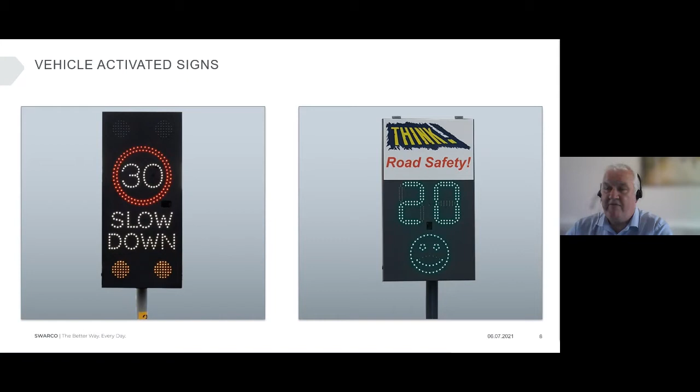The sign is supplied with a Bluetooth interface to allow download of log data from the MVD and upload of controller configuration via the Bluetooth link. The sign components are DIN rail mounted to allow easy servicing and maintenance of the sign in the event of a failure, if a rail mounted component is established as the cause of the fault.

Effectively, that's about the extent of simple MVD activated VAS. Approaching vehicles activate the sign display based on a preset threshold. The controller configuration is stored on a small onboard memory, and the MVD can be utilized to provide log data to inform the client on traffic flows, traffic behavior, traffic volumes, and counts.

Simple VAS are still an important part of an ITS infrastructure where speed or a static hazard, such as a bend ahead, are a permanent feature. The best preparation a driver can receive is to make them aware of the hazard along with a message to reduce their speed.

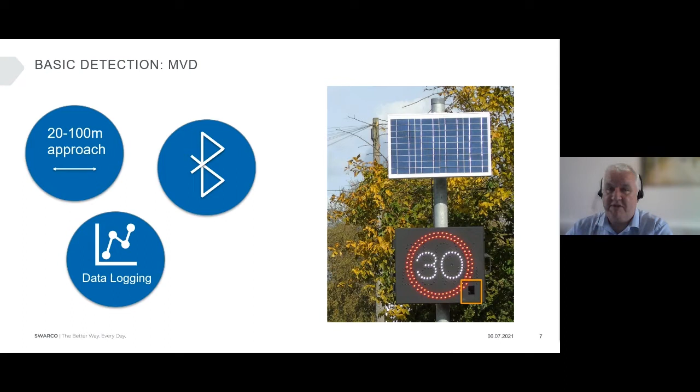Following increased customer focus on value for money and desire for more functionality for VAS products, Swarco began a development program back in 2014 to design its own sign controller, allowing greater flexibility in conjunction with our focus on in-house development and product testing to meet the most rigorous standards demanded by EU and UK regulations. The result of this development was the Swarco Perfectus controller.

The word Perfectus is Latin, and was selected as the name of the controller following a competition held for the Swarco team in 2016. The basis of the Perfectus controller is to provide a basic platform for our designers and engineers to install configuration files, provide outputs to displays and radio transmitter equipment, provide specific or closed contact input from a range of devices and systems, including the radio platform, and allow the controller to support the wide range of functionalities within an ever-developing sector.

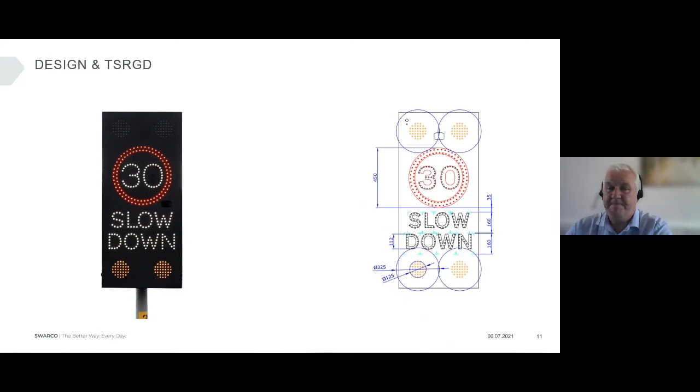To help better understanding of the various solutions the Perfectus controlled sign and system can offer, we've prepared a series of slides to demonstrate how the hazard warning suite of products can be implemented in real-world situations.

The location shown is a real location, Penshire Bridge near Sunderland, built in 1890 by David Balfour for the princely sum of £8,000. I should stress at this stage that we haven't implemented these solutions at this site. This site was chosen merely because it features a host of different potential hazards to which we could apply solutions, and the solutions shown have all been implemented in different locations around the country.

So as you can see, this section of road is typical of many urban and semi-urban schemes where we have vehicle interactions. At its most basic level, where vehicles are approaching the junction in an urban area, the first thing we can ask a driver to do to minimise a potential accident is to reduce their speed. So a VAS placed on the approach to the area is the simplest solution to a potential hazard problem. With the VAS placed in location, the driver may be warned of their speed, or they could be warned of the crossroads ahead by using the diagram 504 crossroad triangle.

So far, so good - our driver sees a sign to highlight the hazard ahead. Having said that, we know from anecdotal evidence, along with a wealth of independent research and testing, that drivers do become complacent to signs they see regularly, whether they be fixed plate signs or illuminated warning signs. TRL have produced a wealth of information on this subject, and TRL 548 is an invaluable document on the subject.

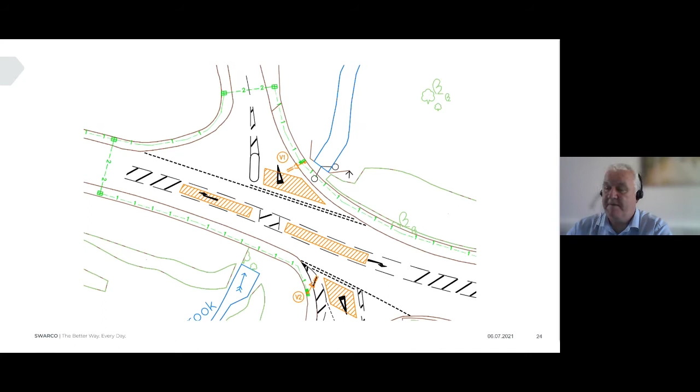Speed detection and junction hazard detection are scenarios that apply to lots of areas around the country. But in all of the cases we've shown up to now, the hazard is a temporary hazard, such as a speeding vehicle or a vehicle detected at a stop line.

We appreciate, however, that some natural hazards can cause significant problems, and in some cases massive immediate and ongoing disruption. A natural hazard in this case is a hazard that's part of the existing surroundings, or one that arises as a result of natural or climatic conditions.

The OVD utilizes a pair of crossroad beams with detector to enable directional sensing in conjunction with a ground loop below the beam.

When a high vehicle approaches the hazard zone, the beams are broken to establish that the vehicle is higher than is safe or practical for the forward route. In this case, a pair of beams is used to provide directional sensing because the beams cover the whole carriageway. Directional beam sensing ensures that the vehicle breaking the beam is the vehicle being warned of the hazard, because a single beam can be activated in either direction.

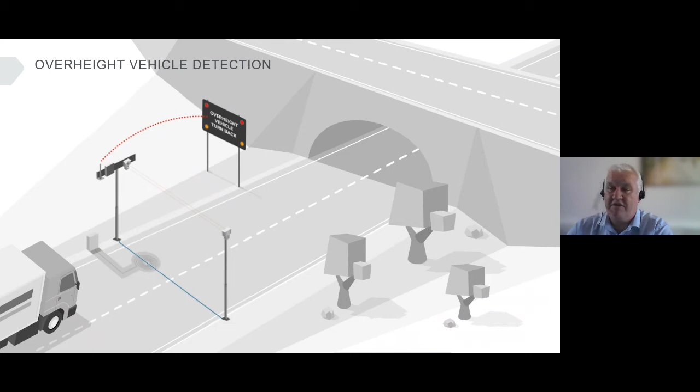A diversion route can be offered, either to turn back or to follow a left or right turn diversion. The main factor to remember with preparation of an efficient OVD system placement is that often the diversionary routes are as important as the detection and hazard avoidance itself.

While it's theoretically safe and proper to ask a vehicle to turn around as part of a diversion, we appreciate that this can be particularly disruptive for traffic through a detection area. So often it's vital to consider a wider diversion route that utilises the detection and warning sign well before the hazard itself, thus ensuring that the traffic, including the high vehicle, all travel in a regular manner without disruption.

OVD systems are an essential part of hazard avoidance on the modern highway, as large vehicles have become much more prevalent on urban and trunk routes. Existing infrastructure such as railway bridges often can't be modified to suit the requirements for larger vehicles, and groundworks to suit the vehicles will be costly and disruptive for extended periods. So a well-planned OVD diversionary route can be an economical solution for highway planners.

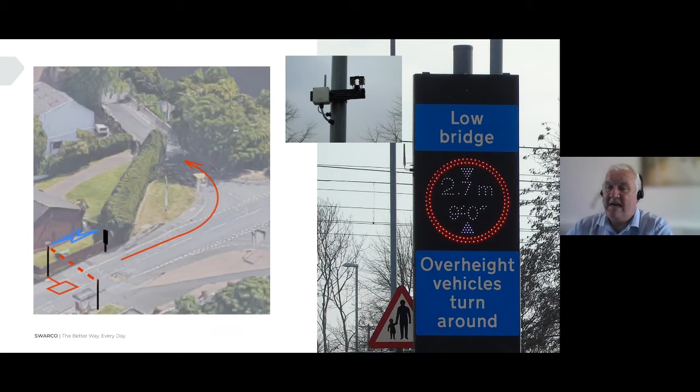A route is also prone to weather-related hazards, and this can be just as disruptive to traffic flow. Local authorities or route operators can sometimes be caught out by quick changes in climatic conditions that create a hazard for drivers, and so an automatic warning system can be crucial in not only protecting the local traffic, but also highlighting a developing problem to the route operator remotely.

An example of this could be an icy road. In this scenario, surface-mounted ice detection can transmit warnings of a cold or icy surface to the sign controller, and as with previous scenarios, the input from that detection in conjunction with a vehicle approach can highlight an ice warning to drivers, and if necessary, advise the drivers to divert to another route.

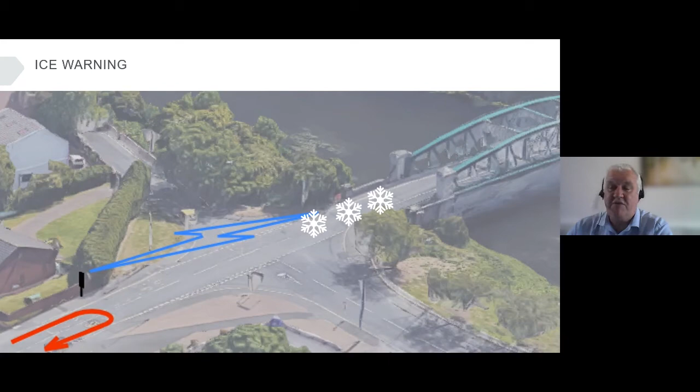Flood detection acts in much the same way. The flood detector is mounted in the waterway and can provide an output by radio to the sign if the water levels reach a point where the route is flooded or is about to flood. As with the ice warning, this provides a message to approaching drivers that the route may be impassable and that an alternative route should be taken.

The important differentiating feature of flood detection is that differing aspects of the output from the detector can be used to prepare the messaging. The speed of rise of the water level, for instance, can be used to move directly to the urgent phase of flood warning rather than the standard first phase, which may be more precautionary.

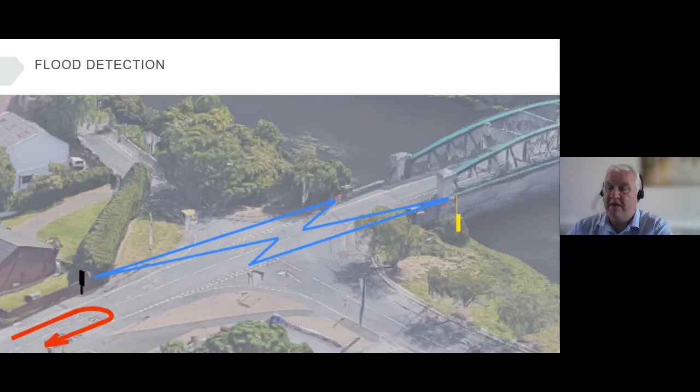With both of the solutions detailed, as previously mentioned, drivers will become aware over time that a triggered system is working with full efficacy based on their understanding that the hazard they are facing actually exists thanks to real-time activation, as opposed to the permanent plate warning sign of risk of ice or of flooding that is always there year-round and becomes invisible to regular users, or a temporary sign that puts the road operative or local authority in the position that they have to attend site to deploy that temporary signage, which allows the operating authority to deploy those valuable resources elsewhere.

Often, once a solution has been implemented, the client can utilize local media to highlight further to the public that a solution to a problem site has been implemented, and that the local authority are providing solutions to help with road safety for local citizens as well as the through traffic.

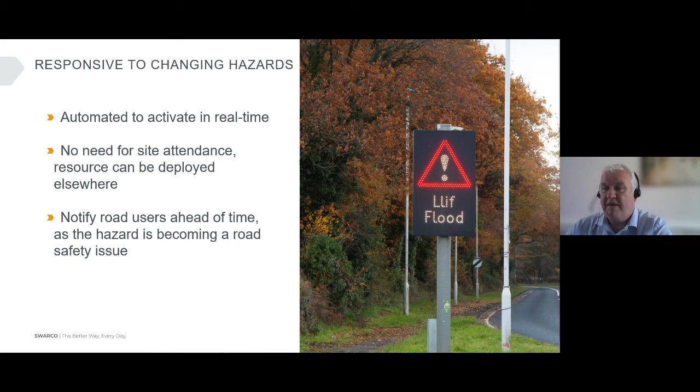Another innovative use for Perfectus control, as we've recently completed, is a tidal flow traffic solution. Tidal flow refers to patterns of traffic during the day where traffic volumes can require lane direction changes to facilitate efficient movement of large traffic volumes.

The Aston Expressway is a classic example of the system, along with ALR, or all-lane running, motorway sections. As we apply this technology to our standard urban environment, tidal flow can be used on a route where, in normal times, simple two-way traffic can be operated. As the sign shows green arrows to proceed or red crosses to prohibit lane access, traffic flows normally.

If, however, our route is subject to large traffic volume in one direction, whether it be general rush hour traffic or, for instance, access to an urban area for a sports or entertainment event, the traffic can be converted to a two-lane one-way system with tidal flow operating within a larger traffic guidance system.

The wider system can advise drivers to follow a specific route toward a destination, and then the tidal flow system, in conjunction with route alterations, can assist in moving large volumes of traffic into and then out of a specific area. This tidal flow system has recently been implemented in an off-highway scenario by SWARCO for Peel Ports at the 12 Quays development in Birkenhead.

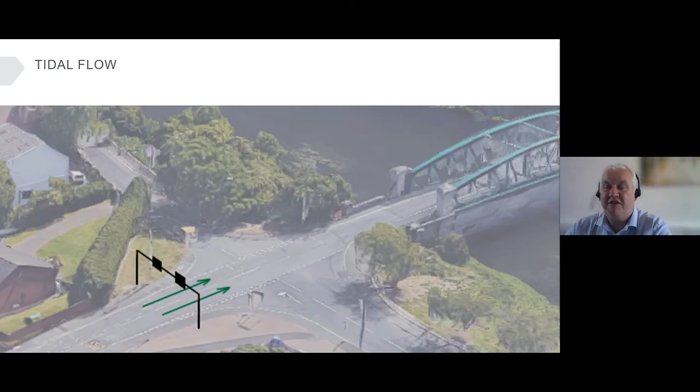A three-lane access is used for freight ingress and egress from ferries. So as the docks are emptied, the traffic is biased to two-lane exit with one-lane entry, and then it's switched to two-lane entry with one-lane exit for new cargo as the ship is prepared for its next sailing.

The scenarios and solutions we've explored thus far are all based on the interaction of vehicles with vehicles or vehicles in the environment. These interactions can be dangerous and costly, both for those involved and those affected, but thankfully, the inherent safety of vehicles that have been developed over time to protect their occupants means that our primary focus has been on supporting their safe passage.

With micromobility and non-motorised users, our focus is different. Micromobility has developed as a sector in recent years, covering not just cycles but also scooters, now increasingly prevalent in urban environments where people of all generations are being actively encouraged to move to cleaner forms of transport.

Add to that the presence of NMUs, or non-motorised users, and a vehicle interaction with an MM or an NMU is brought into ever sharper relief, especially as we move into an area of shared spaces, whether it be cycle routes on roads, cycle superhighways that intermingle with traffic highways, and semi-pedestrianised town centre spaces.

Pedestrian warning has always been a core element of the SWARCO safety signs range. In its simplest terms, pedestrian warning is used predominantly for school pedestrian traffic, with the sign utilising an onboard timer to activate flashing ambers around a retro-reflective warning symbol and associated message.

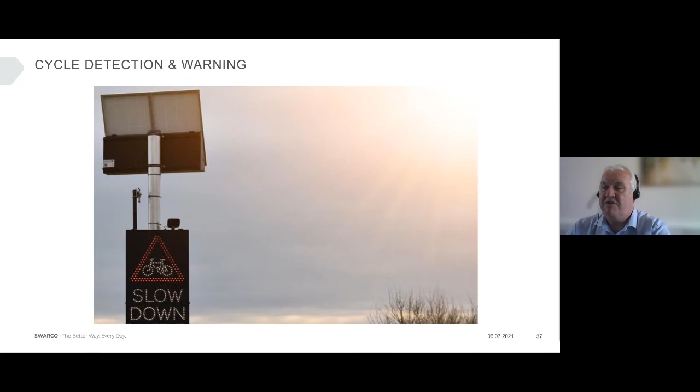While cyclists were the primary focus of the scheme in planning, it was acknowledged that drivers were still an important part of that assessment equation, and that driver safety was still compromised by the restricted visibility into the monitored area. So the use of the MVD to warn drivers to slow down for the bend ahead was also implemented, ensuring the end user got maximum value from their asset.

With the increasing focus on micromobility solutions for urban infrastructure, the utilisation of solutions of this type can become increasingly important at micromobility hubs. In the planning stage, the efficient movement of private traffic, public transport, pedestrians, cycles and scooter users presents specific challenges to planners. So a combination of shared area detection and warning solutions can hopefully provide long-lasting benefits for all involved.

Traditionally, the assumption has been that mains power would be required to support the kind of complex solutions we've highlighted during this webinar. But that's an assumption at odds with the environments where we've seen these solutions work best, such as rural junctions and traffic accident black spots, and with the fact that as we move toward a more sustainable future, solutions that don't rely on fossil fuel energy generation have become much more desirable to us at SWARCO, our clients, and the general public.

Those of you who subscribe to Highways magazine may have seen an article submitted recently by SWARCO where sustainable and off-grid solutions are discussed, and I just wanted to reiterate some of the points made in that article.

People often assume solar and wind are the only solutions available, as they're the most visible at the roadside. Solar and wind solutions have to be carefully considered at the planning stage to ensure the location is suitable. Solar energy is still reliant on a good open south-facing aspect for optimum energy generation, and wind-generated solutions are often compromised by surrounding structures or obstructions, man-made or natural.

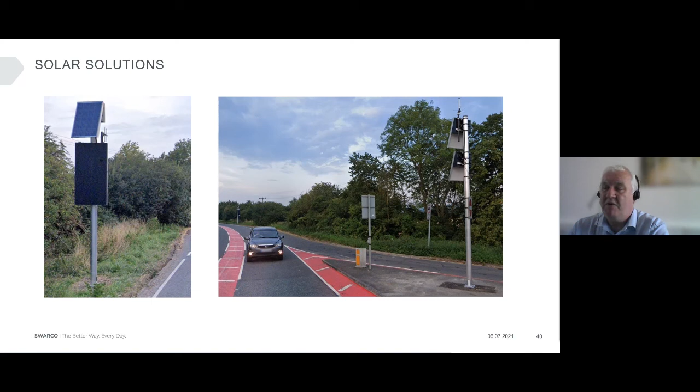Fuel cells utilize methanol combined with air and water in a process known as cold combustion to produce a clean and safe source of energy as a result of the electrochemical process within the fuel cell, often as a backup to a standard sustainable power source.

As you can see, we can provide suitable, sustainable solutions for even the most extreme of operating requirements. An RGB sign, as shown here, requires display performance unlike any other sign in our portfolio, as often the display can be on for many hours as a message is displayed to motorists to warn of a hazard, a diversion requirement, or even to publicize an event.

The sign here features solar power as the original power supply provision, along with batteries to store that generated energy, plus a fuel cell backup for periods of inclement weather or extended darker periods during the winter. The power provision also supports scheduled communication to a remote monitoring station, allowing power consumption and fault data to be downloaded, and messages or displays to be uploaded.

Hazards on the highways take many forms, from natural hazards caused by the local topography and landscape, through pedestrian and non-motorised modes of transport, through to private passenger and heavy freight and commercial passenger transport. And every scenario needs its own considered solution.

Hazard warning is never one size fits all, and even with a system seen as a defined solution, such as OVDs, there is still a lot of consideration to be made in preparing a successful solution, from detection placement to diversion rerouting, provision of power, and whether that power is an on-grid or off-grid solution. And in the rare event that there's a problem, how do we minimize disruption to local drivers and residents and ensure that our vital infrastructure isn't unduly disrupted.